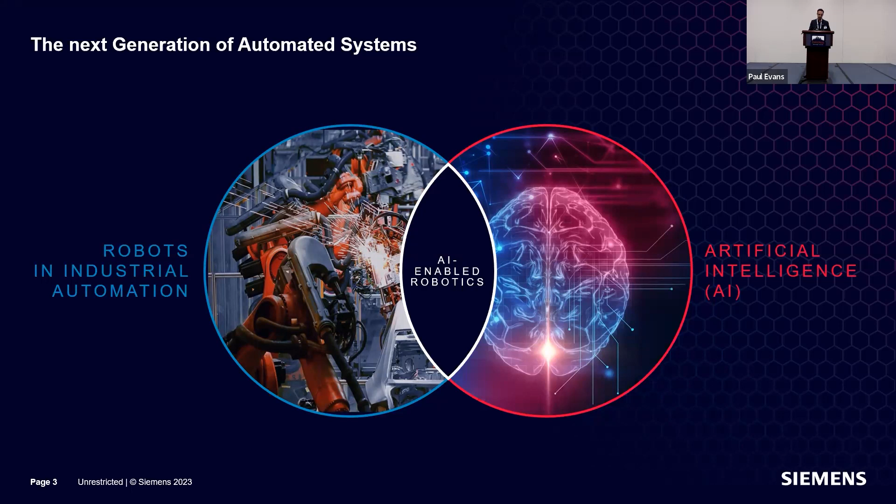So if you look at all the success deep learning had in other domains, then the question arises: is there anything we can reuse that will enable new applications, make things easier in our robotics world? And this is really what a lot of our work is about. So this intersection of what we call AI-enabled robotics.

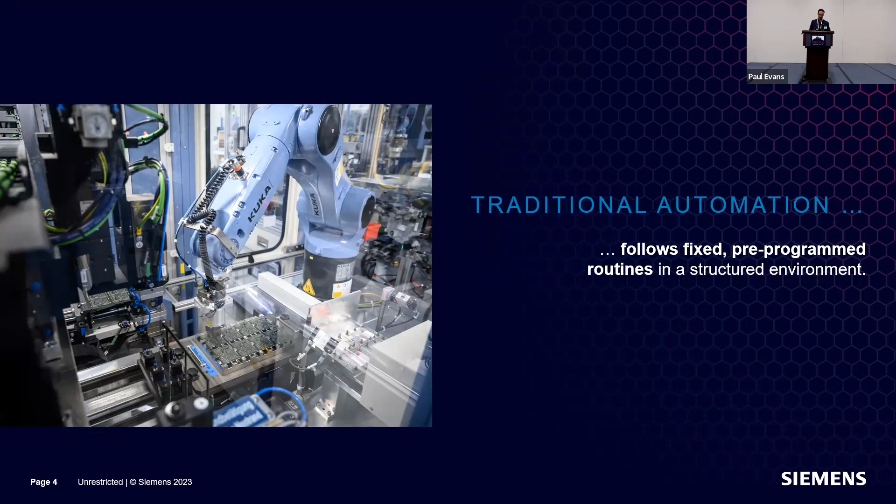All right, so as mentioned, what characterizes traditional automation? Typically, the robots follow fixed pre-programmed routines in very structured environments. That typically means they're programmed once to follow specific waypoints, paths, trajectories, you name it. And then they just repeat this sequence. There might be a little bit of logic that allows for some variation, but typically they're not able to reactively respond to sensory readings. Often they don't even have sensors such as cameras or other sensors that will allow flexibility.

The strand of AI-enabled robotics that I just mentioned tries to loosen some of these assumptions, so to make things more generic, to actually allow robots to make higher level decisions with respect to their actions. So it's really about moving automation forward to autonomous systems, where we develop machines for some generic task, and then we leave it up to the machine how they act in an unstructured and dynamically changing environment.

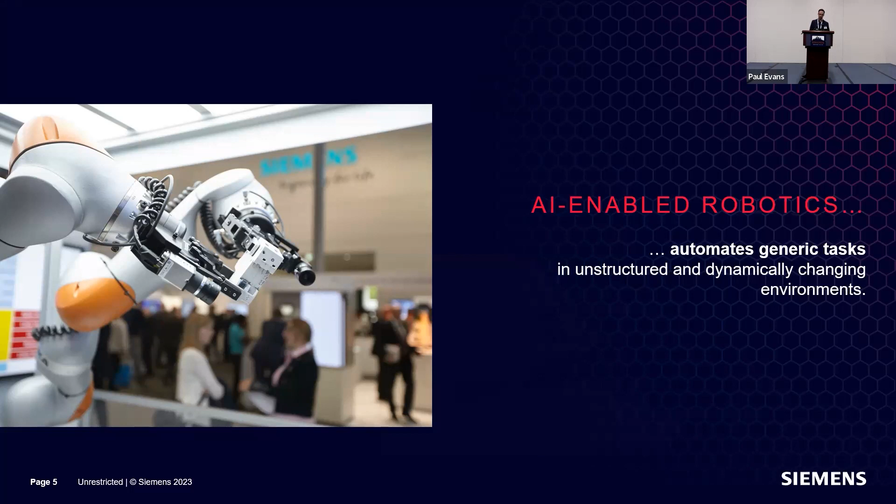And this is, of course, deeply inspired by the way biological organisms act. So humans, we typically sense, reason, and then act. And if you look at a lot of tasks in manufacturing that are not yet automated, those are typically tasks that require exactly this type of sensing, reasoning, action loop at various frequencies and difficulties. And what's really quite simple for humans, such as picking something up, is actually extremely hard for robots, as we all know.

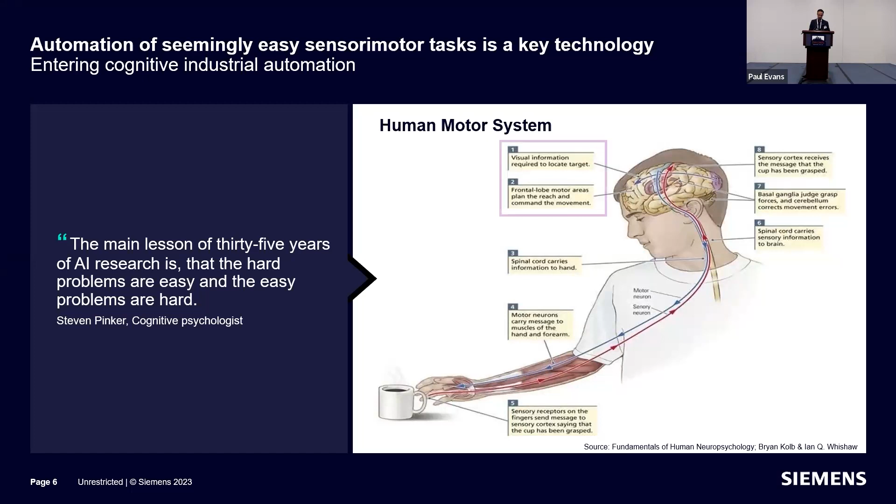So here, the challenges are often: how can we engineer those tasks more easily? How can we integrate robots and software in a simpler way into existing workflows? So those are the challenges on the left-hand side. So there's still a lot of work for us to be done. And this is what's driving a lot of today's robotics deployments, as you have also probably seen at the Automate show this week.

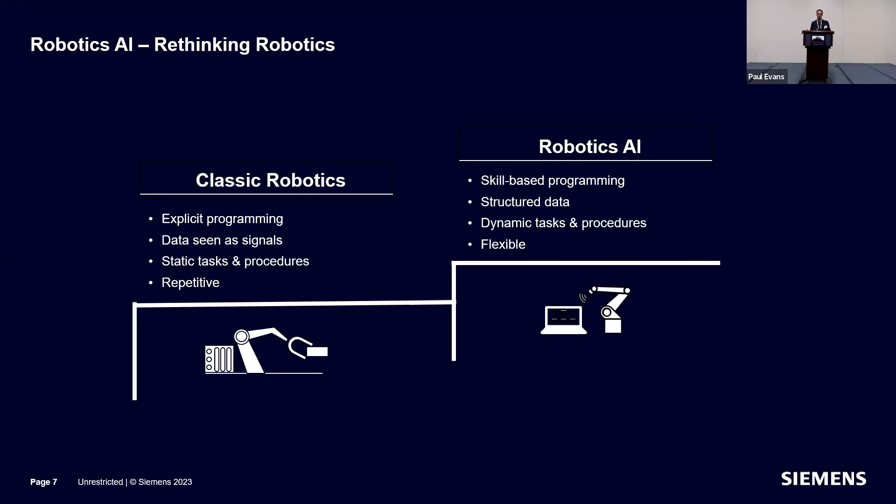And then on the other hand, there's this additional, let's call it additional pillar that addresses very different use cases. So it's not a competing paradigm. It's actually a new paradigm, which deals with skill-based programs or programming. So very structured data, tasks and procedures are dynamic, and it allows for a much higher degree of flexibility. So we're looking at all the tasks where the previously described sensing, reasoning, action loop can be deployed.

So now the question is, how do we actually achieve such cognitive behavior in robots? We need 3 ingredients. The first ingredient is, of course, perception, because if the world is variable, if the world is ever changing, we need to perceive these changes, and that's where sensors come in. So those can be cameras, tactile sensors, force-torque sensors.

It's a field that has seen a lot of attention recently. So we know that over the last 10 years, RGBD cameras, so 3D cameras in general, have been dropping. So prices have been dropping there, and capabilities became better and better. Then for a couple of years now, we have also seen the same interest in tactile sensing, although it's not yet at a point where it's widely deployed anywhere.

Then the second ingredient is, of course, reasoning. So all the sensory data that we are acquiring needs to be used to derive actions, and this is usually also combined with some prior knowledge of the world. So a world model, for example, where we maintain a state of the world that is then continuously updated with the sensory readings. And then the third ingredient is the robot arm to execute the action with the respective end-of-arm

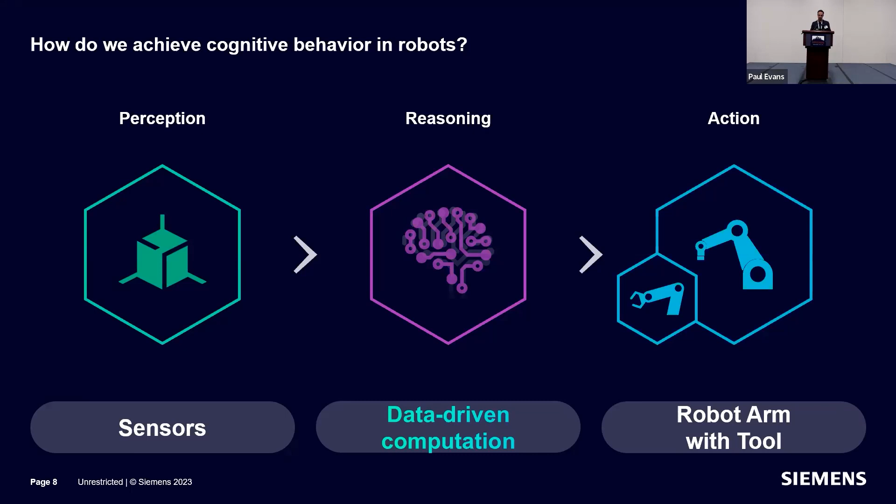And then another ingredient which we consider actually important is the democratization of this technology, which means we want to give these applications, these tools into the hand of automation engineers in the field. So not just deep learning experts who know how to train a neural network model, how to generate synthetic data for that.

But it's really about making those accessible, because we do believe there is a lot of functionality that is already available, but it's just not accessible. And this is something we would also like to change, and that's an important aspect to drive this forward. And this is actually also where the ROS community plays an important part.

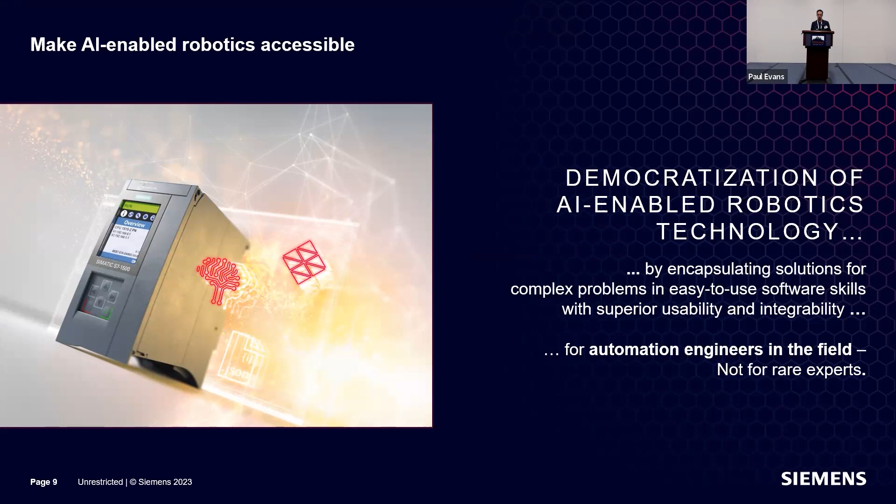All right, so what I'm gonna do next, I'm just gonna walk through 3 applications that we have worked on and that others have worked on that are particularly applicable or were solved by this robotics AI paradigm. So the first of it is piece picking, robotic piece picking. So piece picking, and here we see a use case example.

It's everywhere. So we have tons of jobs, actually tens of millions of jobs all over the world where people do nothing but just piece picking. So here you see a photo where pretty much everything is automated except the act of picking. And that could be a typical warehouse or a typical situation that processes one of your packages that you ordered online.

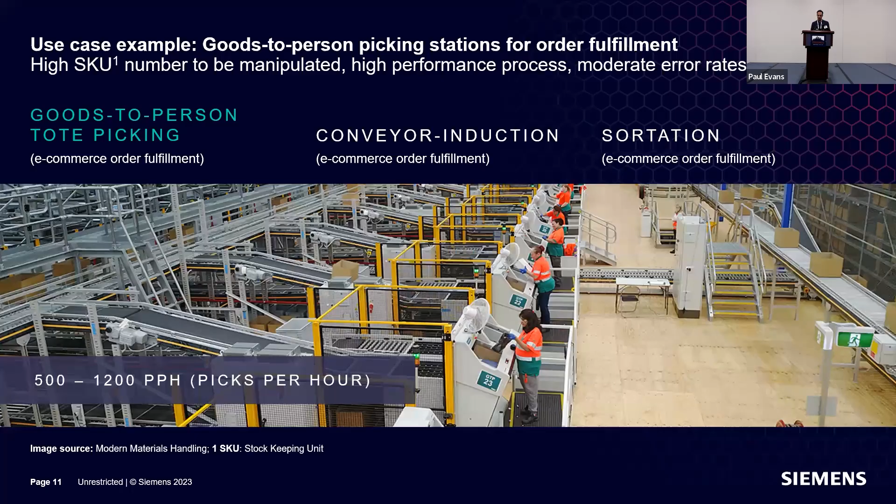And if you think further about it, then you realize that picking is actually a very prevalent task. So machine tending can be seen as some type of picking, and many others. So there's actually a huge incentive to automate piece picking, and this is also reflected by market studies. So this is one of them, and you can either look at the dollar volume on the left-hand side or the quantities, but the story is basically the same.

It shows you that the piece picking robot market, and this is just for warehouse automation, is actually quickly growing. And also, if you went to trade shows such as ProMat in Chicago 2 months ago, or LogiMat in Stuttgart a couple of weeks ago, you have seen that this field is actually fairly mature. So there are a lot of products that can solve these type of use cases. So piece picking for warehouse automation.

Now, what made piece picking for warehouse automation difficult so far? It was the fact that you need to deal with potentially millions of objects, millions of SKUs, and you actually don't have any models. You don't have any prior knowledge of them. So you need to figure out how to pick things without actually knowing what you're going to pick at runtime. So you need to develop a skill just for picking.

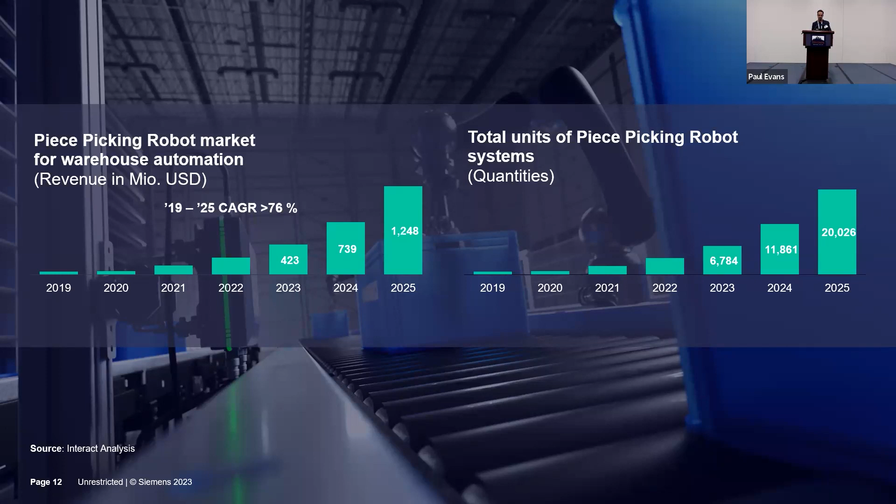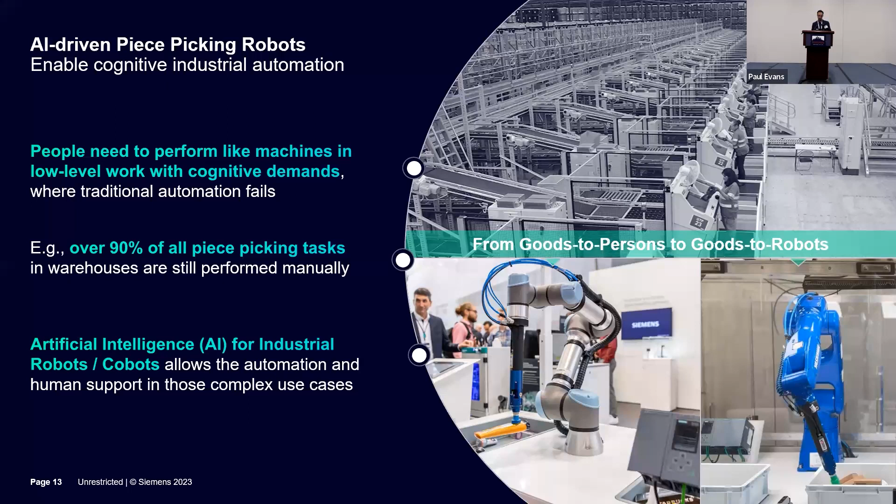And this actually has been solved with AI methods, with deep learning methods. So probably one of the best known papers in this area was the DexNet paper by Ken Goldberg's group at UC Berkeley in 2017, where for the first time it was shown that a supervised deep learning approach can actually outperform any non-deep learning approach for picking unknown objects. And since then we saw a bunch of commercial solutions on the market. And we actually are offering a solution as well.

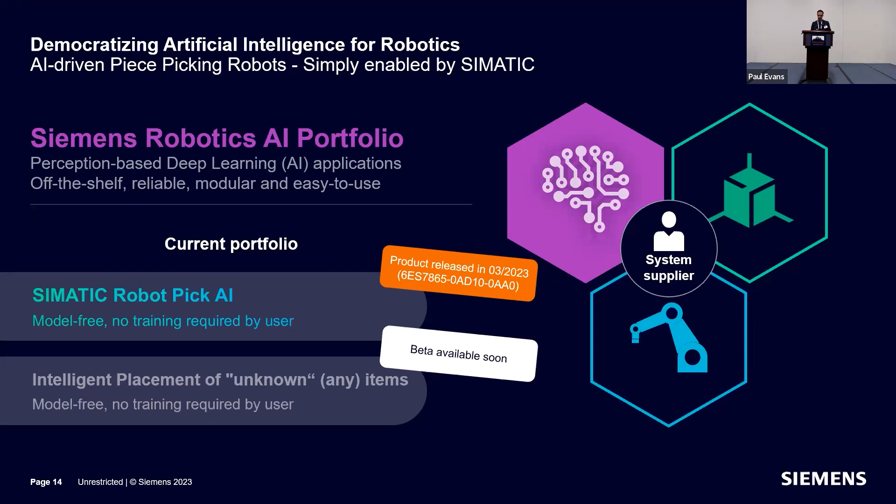So Siemens has a library for PLC called SIMATIC Robot Pick AI, which was released 2 months ago in March. And this is a library that is installed on our PLC module. It's robot agnostic, camera agnostic, and end-of-arm tool agnostic. And it allows you basically to pick any type of unknown objects, primarily in intralogistics applications.

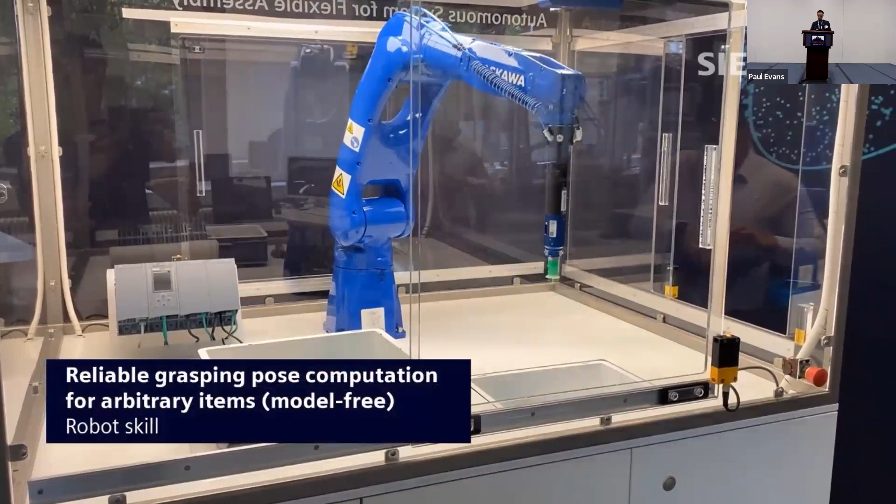Here's a video, so that was not the demonstrator at this trade show, but at LogiMat. And actually, it will also be shown at Automatica next month, I guess. So this is a typical application where robotics AI actually led to a breakthrough.

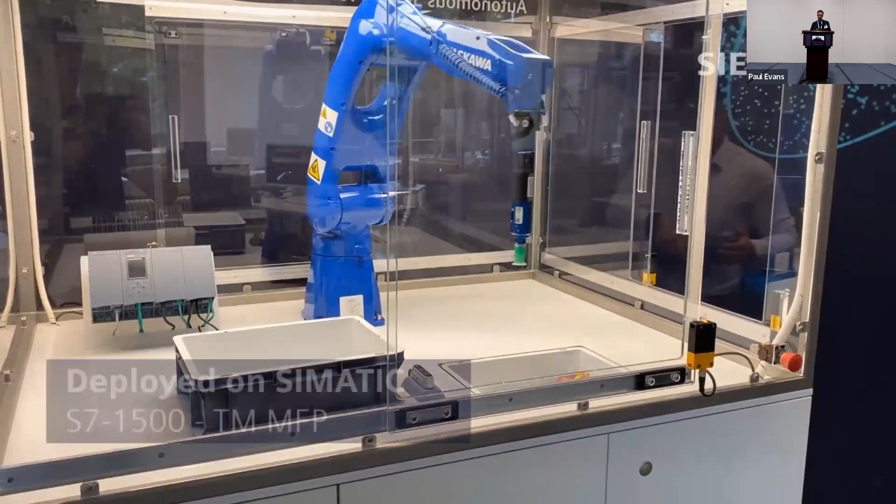So the robot encounters objects it has never seen before, does not require any prior knowledge, and then based on an RGB-D camera, we can compute grasp points on these objects. And here you see one grasp point that is shown on the UI, allowing basically the robot to pick and place different objects.

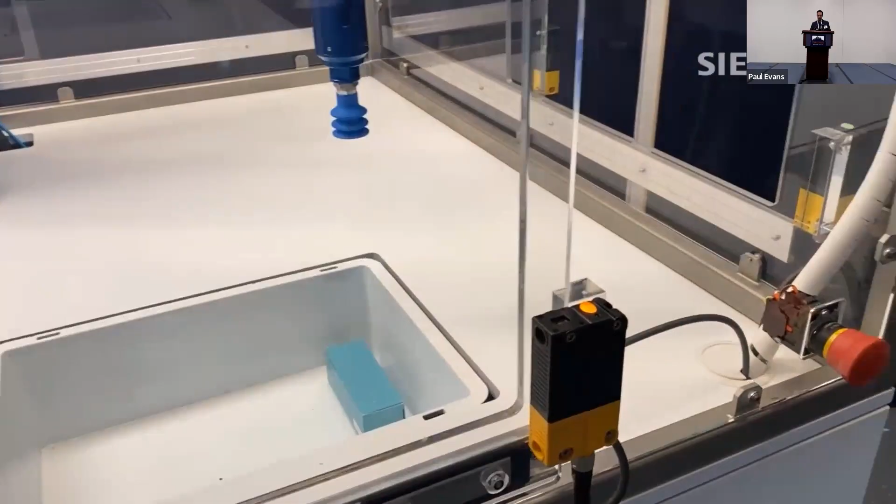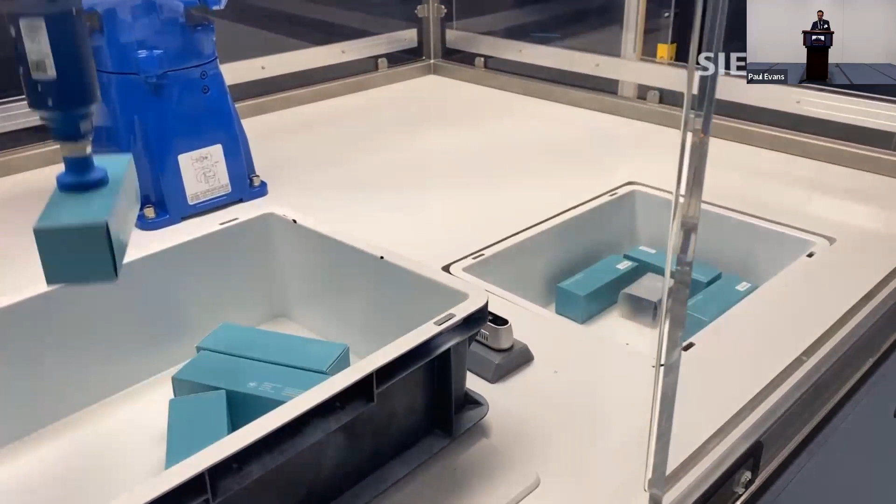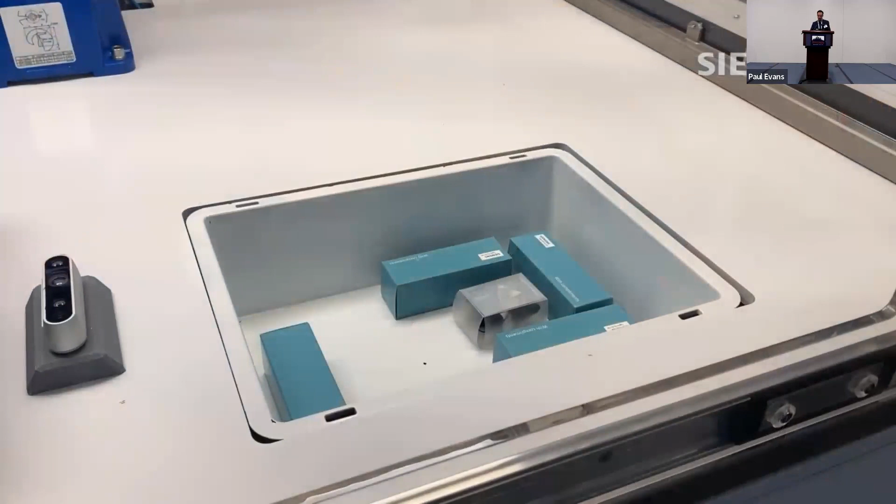And then one thing that is also actually quite interesting is the placing aspect. So for a long time, many people worked on picking of unknown objects. And then eventually everyone actually realized that you also need to do something with the objects after you pick them. And a lot of tasks or use cases require you to do more than just dropping them somewhere on a conveyor or in a bin.

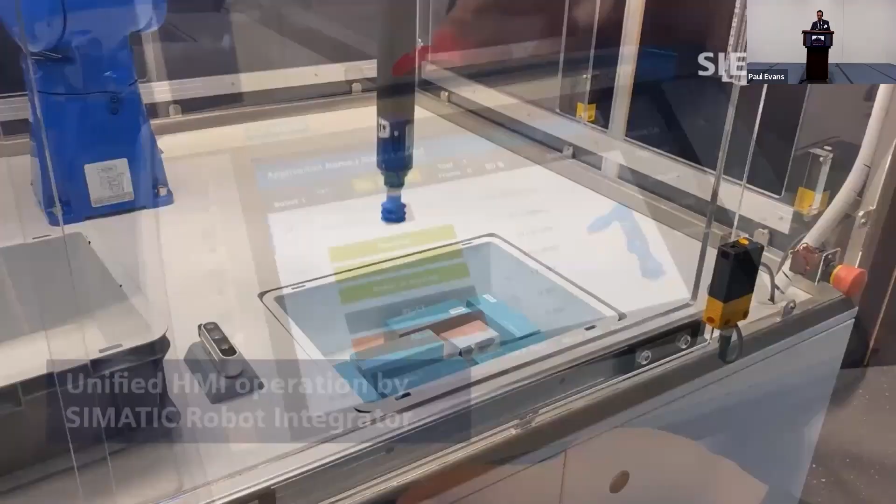And yeah, one such use case is smart placing. So basically playing Tetris with the objects, finding the gap and putting them together. Good. All right. So as mentioned, I'm gonna walk you through 3 different applications. This was one of them, robotic piece picking of unknown parts.

Now, the second application I'm going to talk about is apparel manufacturing. So something very different, however, as impactful and meaningful as piece picking. And I'd like to motivate this part actually with a comparison with other industries. So if you look how automation and robotics transformed most of today's trillion-dollar industries over the last century, then we see actually how things were quite manual 100 years ago and today mostly automated.

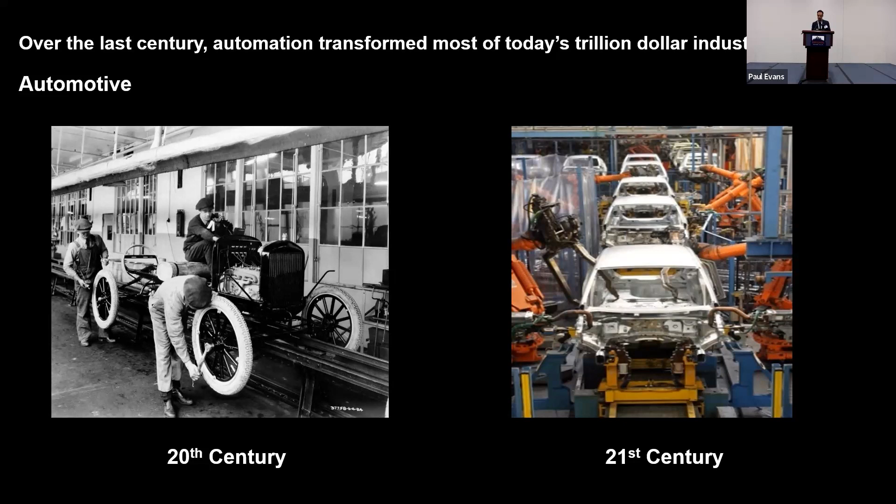This applies to automotive. This applies to electronics. However, if you look at apparel manufacturing, we actually see it's pretty much the same. So the way things were done 100 years ago resembles a lot how things are done today. In this case, the only difference is that the left-hand side is a black and white photo and the right one is in color. And the reason for that is simply because manipulation of limp materials is really hard for automation and for robotics.

So it's not that there's no research. There's actually quite a lot of research going on. So next week at ICRA, we will see again a lot of fundamental research in this space, manipulation of limp materials with robots. But nevertheless, we didn't reach yet the point where this can be automated in the same way we did in automotive or in aerospace or in electronics.

So if you want, this is one of the grand challenges right now of automation, if you look at the industry, because it's literally the last non-automated trillion-dollar industry. And it also has somewhat of a regional component because, as you can imagine, there's hardly any apparel assembly anymore in the US or in Western Europe. All of that happens today in Southeast Asia because that's an industry that just always followed the cheapest labor cost.

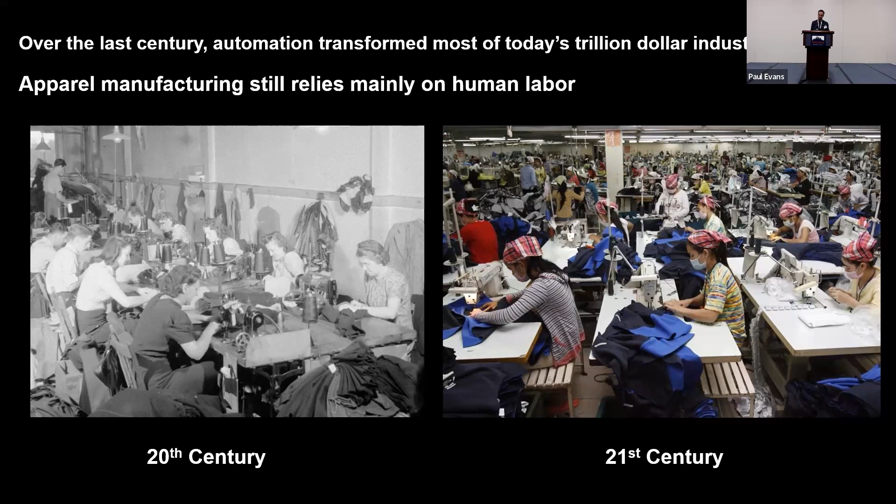However, with the disruption of the supply chains and so on, there's actually a huge interest also to onshore those industries, both in Western Europe and also in the US. And one of the ways to do it is actually to introduce automation, because that's how you can cancel out the labor factor. If the labor ratio becomes small, then it doesn't actually really matter how high the cost of labor is.

And we have been working in this field for some time with our partners who you see here. So with the ARM Institute primarily, but also with, for example, USC, SK Gupta's group, but also Roger, who I see here in the first row. And that's actually one of my favorite applications. It was, or is, our AI-enabled bottom hemming project.

So just to give you the scale of the market. 2 billion t-shirts are produced every single year worldwide. That's a $38 billion market. And there is one operation that has to be applied to every single t-shirt, and that's the bottom hemming operation.

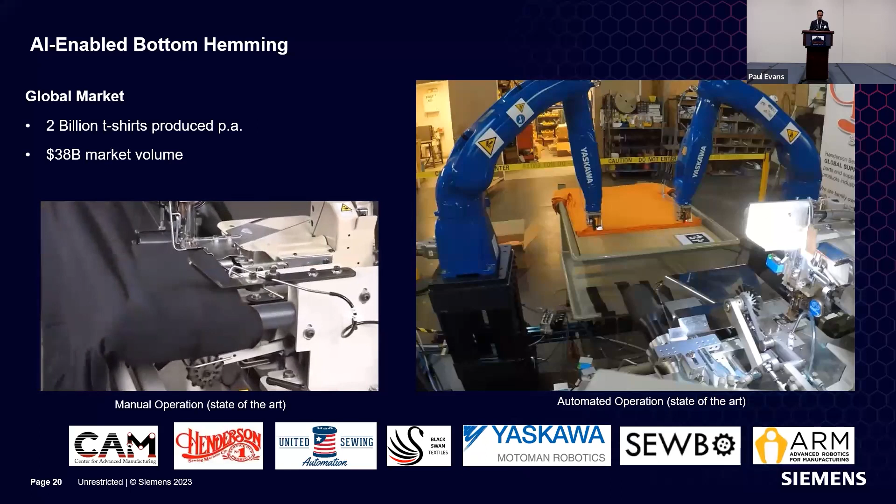So if you look at a t-shirt, if you're wearing one right now, at the bottom of your t-shirt you'll see that the end is flapped around and there's a stitch. And this is how it's done. So on the left-hand side, is the video playing? Yeah. So you can see there are machines for that, but what you need to do is actually to put the t-shirt on the machine, and then the machine actually takes care of the rest, and it ejects the part as well. And this is done 2 billion times per year.

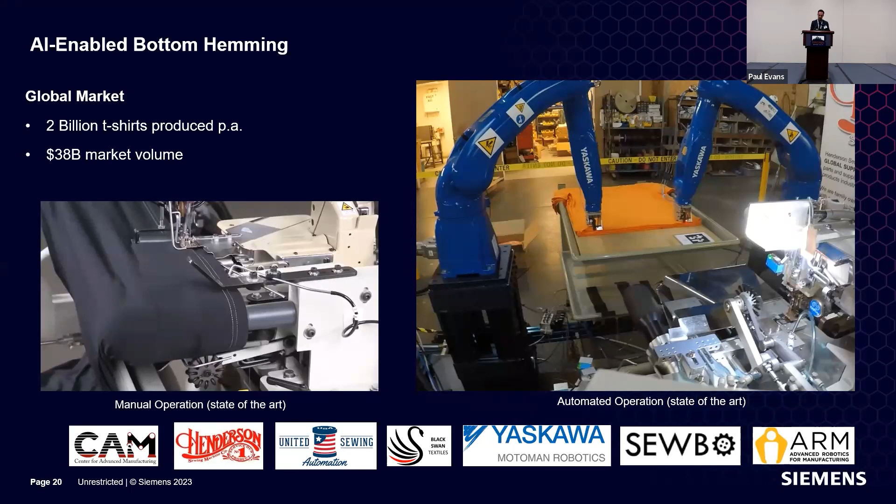So what we actually did, we again used a perception reasoning action loop to automate this operation with 2 robots. And that's actually now exactly the same operation, but automated. This is at Henderson Sewing in Alabama. And there are two spots here where we use machine vision.

So first of all, the first one is to detect the features that allow us to pick the t-shirt. That's right here. And the second one is here, where we detect this loop. Because after picking up, every t-shirt shows a different loop that we see here. But exactly this loop, it's actually crucial to understand this closed loop in order to derive the action that will put the t-shirt on the machine.

And the interesting thing is you can use exactly the same approach for a related application, which is t-shirt printing. So a lot of t-shirts have a print, and it's pretty much the same interface, mechanical interface, which would be another 500 million t-shirts every year.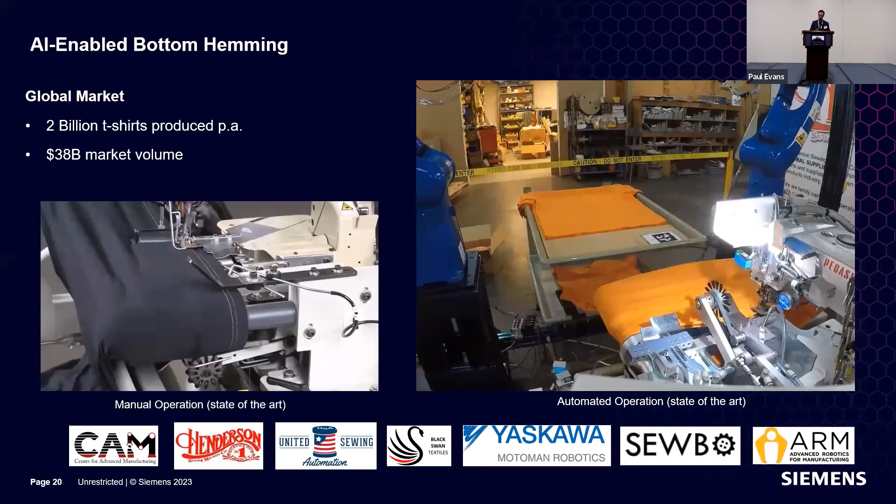And then my third application example, and again, that's another manipulation example, is a little bit more involved in terms of the actions that need to be performed. It's industrial assembly. So we have work that centers around reinforcement learning for insertions and assembly. And just to recap what reinforcement learning is about, it's basically letting the robot or the machine try things out, take different actions, and then learn from observations. So the robot takes an action, it gets a reward, which is basically telling it whether it was a good action or not. And based on this reward, the robot can refine its actions.

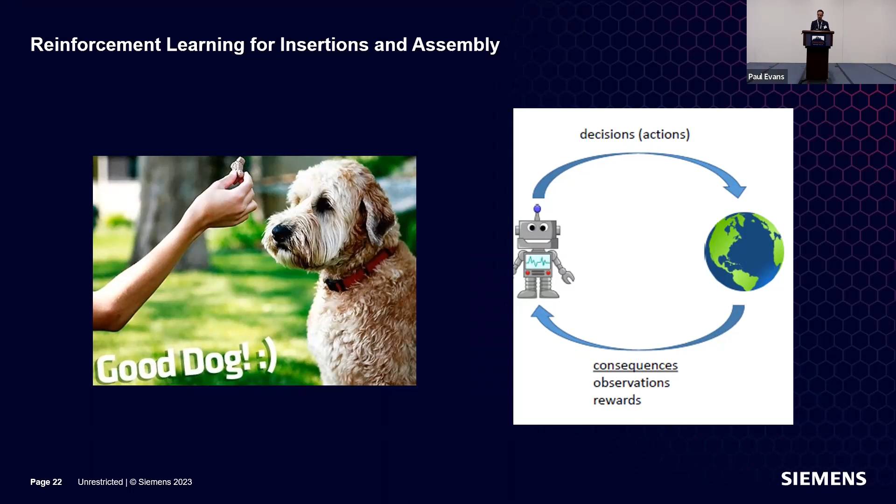And that's a nice approach if you don't want to or cannot express the robot program explicitly. And yeah, this is often the case when you deal with complicated use cases that have contacts and exhibit a lot of friction, like insertions and assembly. And let me show you how it works.

So this is the phase where the robot performs trial and error and learns how to do the insertion. So it knows whether it succeeded or not after it tries the insertion. And whenever it succeeds, it knows that its actions were beneficial. So it reinforces the policy. And then, let me stop the left-hand video.

So the interesting thing is that you can apply exactly the same program to a very different part without changing anything. And it works as well. And this is, of course, a great advantage because it completely removes reprogramming if you do product changeovers. So we can go from one type of assembly to another type of assembly without touching any code, without switching any program. It's exactly the same program.

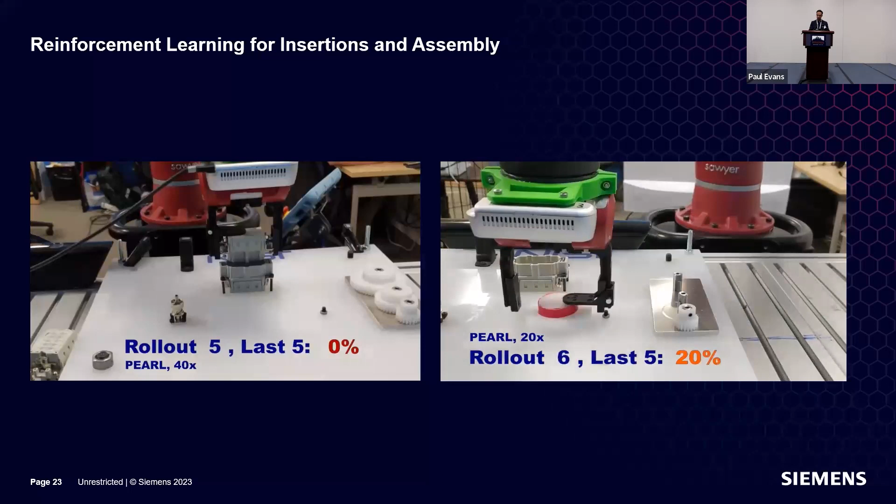And so this is actually some of our work from a year or two ago, but next week at ICRA, we will show our newest results, which uses a similar use case, so connector assemblies, but is significantly more robust and much better.

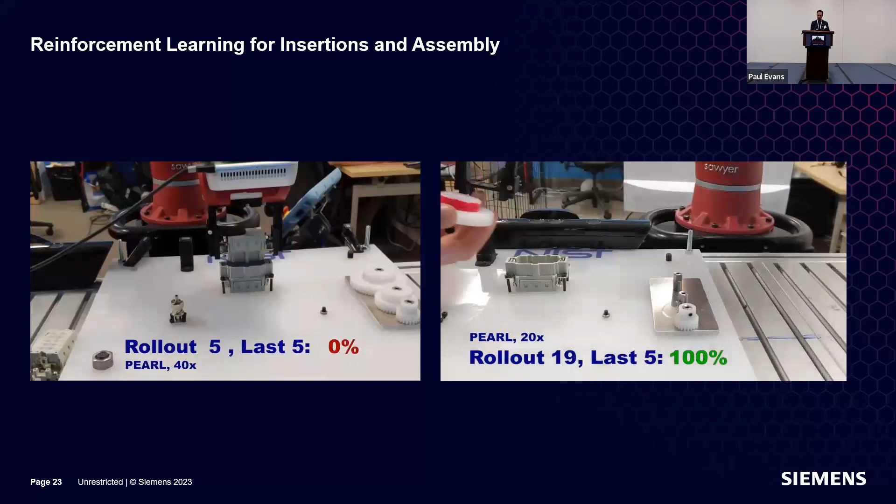All right, then this actually concludes my 3 use cases. And let me summarize and provide a conclusion. So there are basically some use cases that are still not automated and that will greatly benefit from cognitive capabilities. So this sense, reason, act paradigm will allow us to deal with flexibility and uncertainty while at the same time reducing engineering and commissioning efforts, as we have seen in the last example.

Then the skill of picking and placing seems to be the most mature. So picking and placing unknown parts, picking and placing parts that are randomly placed in a bin.

However, even here, we are only in the beginning. So if you think about how many different picking and placing applications there are and how few of them have been automated in production, there's still a long way to go. So I'm pretty sure it will take us at least another 10 years to work on picking and placing.

And then, of course, the overall driver for all of this, the advances in machine learning. So not just the ones we've seen in the last 10 years, but also the ones that are now coming up. For example, foundation models have now been very successful in solving NLP. And there are actually a lot of folks also working on applying foundation models to robotics to provide some type of common understanding and reasoning. And I'm pretty sure this will soon give us pretty great results here as well.

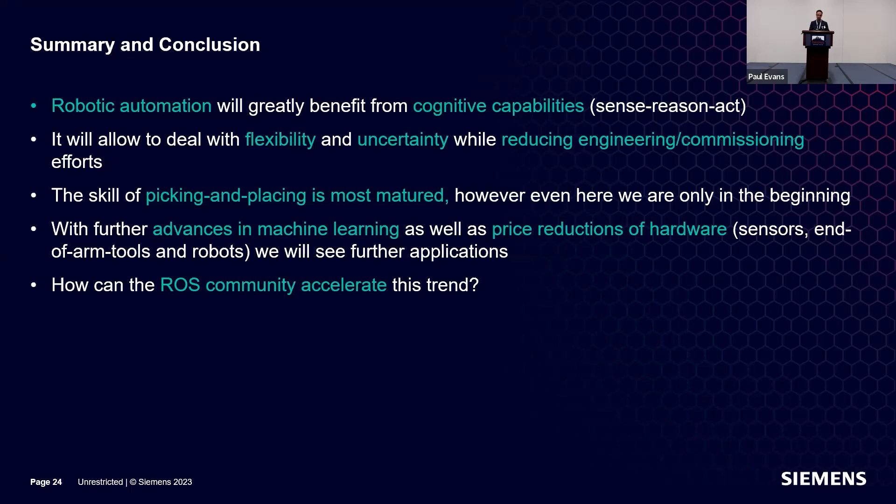And as I mentioned, we use ROS a lot in our R&D work. And given this trend of robotics AI, so combining machine learning, deep learning with robotics, we as a community should also think, how can we accelerate this trend? How can we provide additional tools that can help here for the various applications?

So this concludes my talk, and I think we have a couple of minutes before the break. Thank you for listening, and I'm happy to take any questions.

I guess, actually, can I go first? Yes. Right, so obviously Siemens makes some hardware, right? I don't know if you have insights, but will the trends actually manifest in the products Siemens offers as well? Is that a trend you're seeing? You're able to offer lower cost solutions because of the advancements in, for instance, AI? Is that a trend you even see within Siemens?

Could you repeat the question? So in your summary, you had the impact of AI potential and reduction of cost. And obviously the RealSense is a great example too, right? Where now I get 3D perception in a couple hundred dollar piece of hardware. Are you seeing that trend as well in the products Siemens offers?

Yeah, absolutely. And there are two sides to that. One of them is increased performance for the same price, and RealSense is a great example. We actually use RealSense cameras a lot. But we also offer, for example, lower cost IPCs and PLCs, simply lowering the price for compute in industrial domains. So we have, for example, the IPC 127, which is a smaller, more cost-effective IPC, or the LOGO! PLC, which is exactly this story. Thanks for asking that.